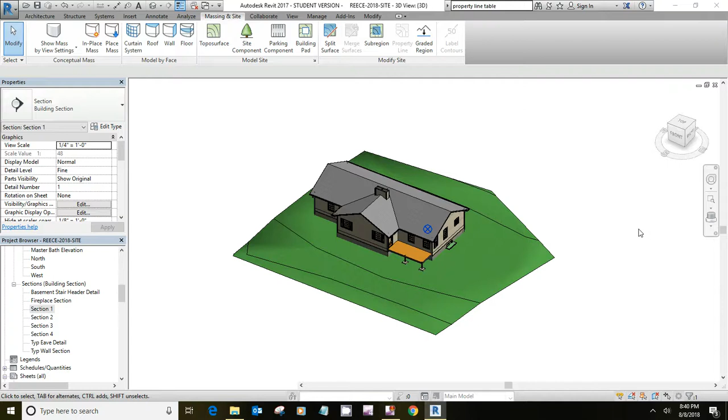All right, so we've got some soil and we've got some grass. Let's look around. All right, so this window well is showing up. Okay, it's above the ground surface, but yes, it's full of ground.

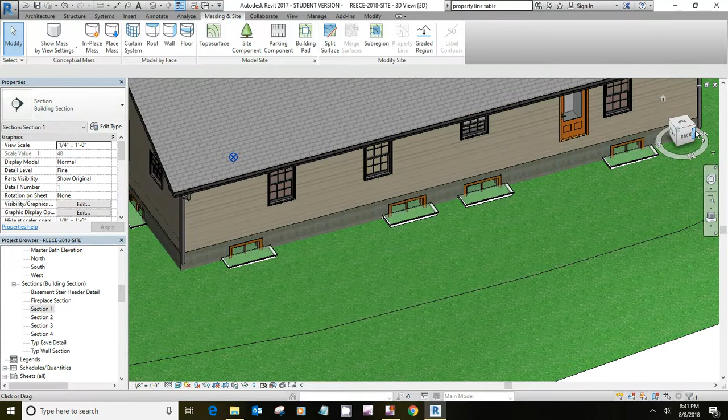So let's check the back side of our house. All of those are above ground. Okay, and that one's above ground.

If we had a circumstance where the window well was not above ground, then what we do is we go back and we add a survey point in the vicinity of that window well to push the topo surface down right in that area. Okay, and then that would get it fixed up.

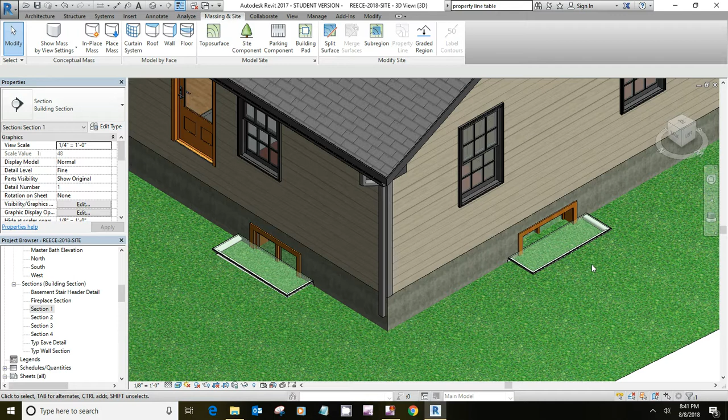All right, now then, take a look at your section view, and you will see that we have a basement full of dirt. Okay, and we deal with that with what's known as a building pad. And I'm going to go ahead and tell you we've got an issue right here with our footing and our slab because we're supposed to have 4 inches of gravel under the slab.

And we really can't. We could put in 2 inches and then 2 inches. It'd be kind of weird. And really, in the construction, they're going to do a full 4 inches across there. They're not going to do it 2 inches below the footing and 2 inches above. They're going to go full 4 inches.

The easiest way to fix this is we lower our footing by 2 inches, and we have to increase the height of our wall by 2 inches.

I'm going to go to this one, top of footing. I'm going to add 2 inches to that. It pulled everything down 2 inches. Okay.

Bottom of footing kind of changed. Okay, just to get that back in the right place.

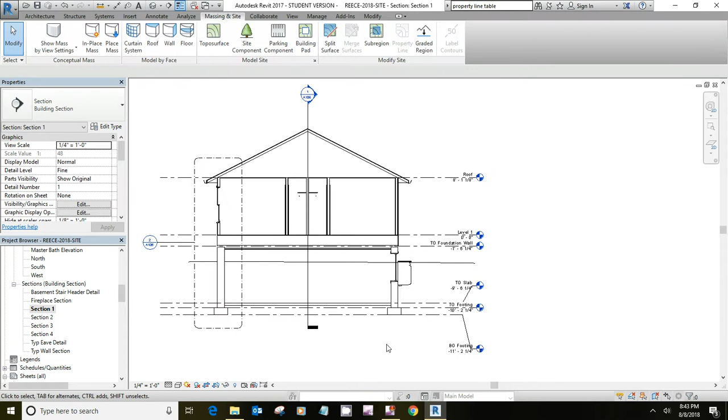Now let's go to our 3D view, because you can see when we pull that down, it dropped the top of our wall down from our house. But we could pick that, but I want to pick it in my 3D view so I can see what's going on.

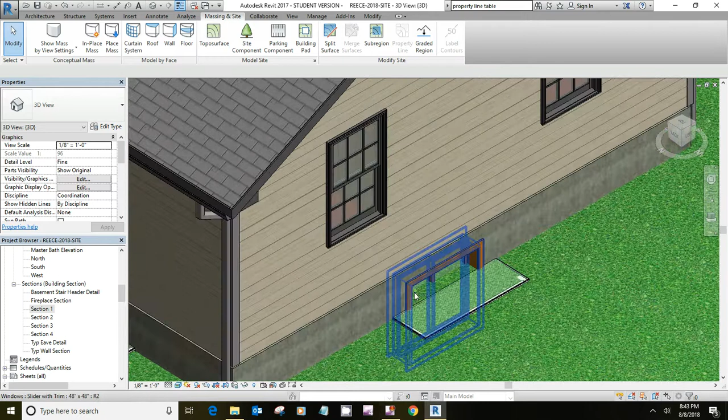If you come in here and you look at it, then you see we got a gap there. So let's select one of the walls and right click and go select all instances in entire project.

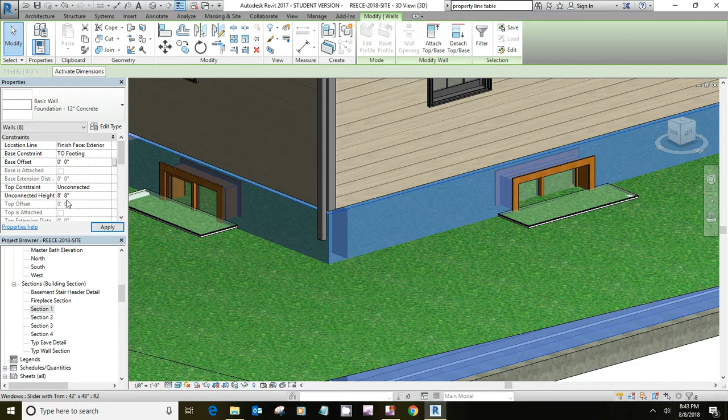And our top constraint, let's add 2 inches to the top of that and make it 8'8". Okay, so that closed that up.

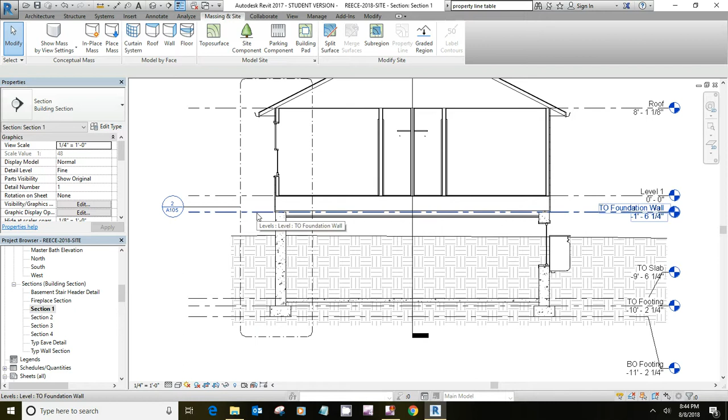Let's go back to our section view. All right, so that got that pulled back up to our top of foundation wall level. Or when you created the walls, if we'd have tied them to top of foundation level, then it would have been an automatic fix.

Okay, all right, now there's two different ways to deal with gravel underneath here. One, we can edit the floor to add gravel under it, or we can do a building pad that has the gravel. I'm going to show you how to do a building pad anyway.

So let's go in here. Let's just edit our floor. I think we can do that because there's nothing penetrating our floor. So let's edit. Let's duplicate it.

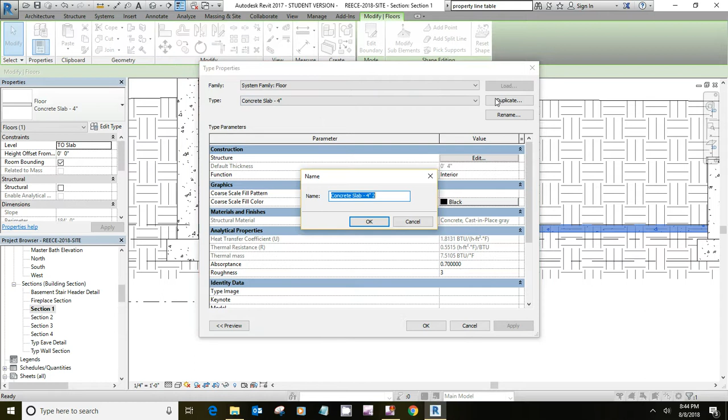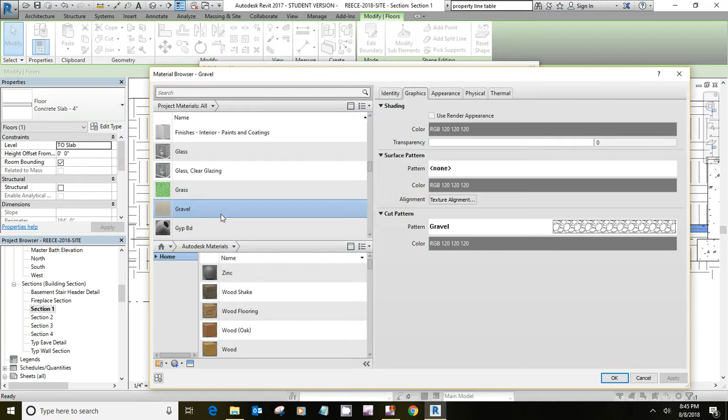And we'll edit our structure here, insert a layer. And I want gravel, so you do a search for gravel. If it doesn't show up here, it'll be down here in one of your materials. So you add it. And we'll go okay.

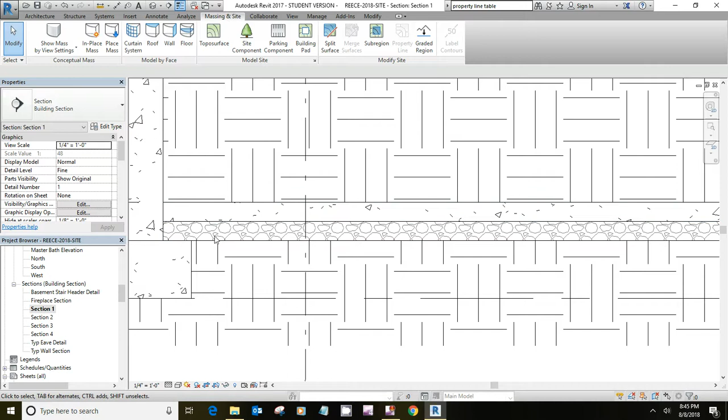And we want it to be 4 inches thick also. All right, and so that got our 4-inch concrete slab and our 4-inch gravel, and the top of slab level didn't change. Okay, we just pulled our footing down, and so the slab stayed at the same place.

Okay, so now we've got to get rid of all this dirt inside the basement, and we do that with a building pad. And to do that, we're going to... because you can see the wall actually cuts out of the dirt. Okay, and so we'll go back to our site plan.

And you remember these lines that we drew in here on our exterior walls? Those are fixing to come into play with us. We should probably hide our roof also.

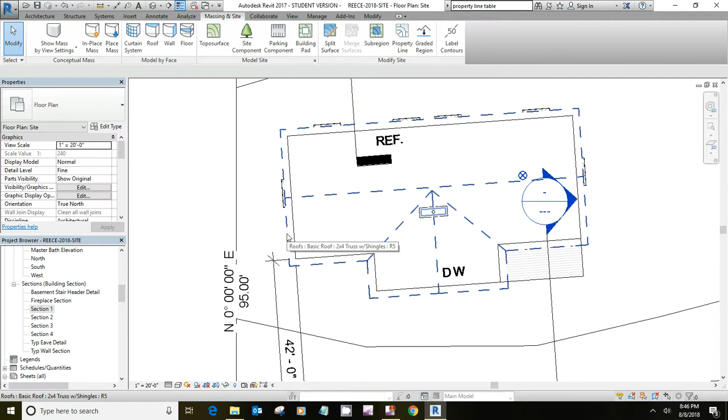Okay, so here on our massing and site, let's go building pad, and we need an elevation. Let's see, it could be top of footing. Height offset, we'll go 0.

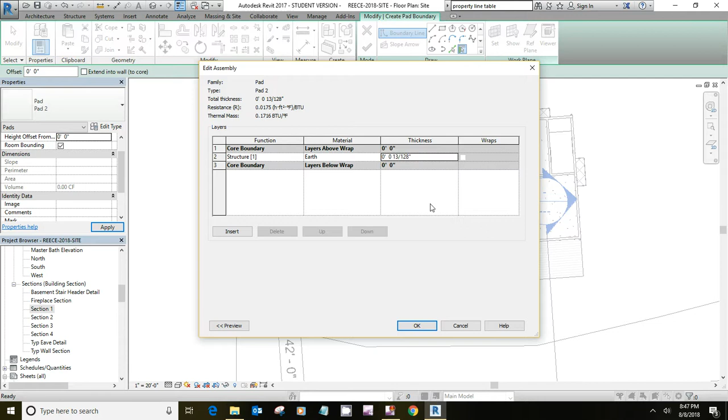Now let's edit our type and edit our structure. It is earth, and we want to make it really, really thin so that it's just a line. I put in 0.1 of an inch, and that come out to 13/128. So you just type in 0.1 inch, okay?

And that's okay, it may be pad 1, maybe pad 2, depends on how many of them you're doing, okay? And so let's go pick walls, and let's pick the exterior walls of the building.

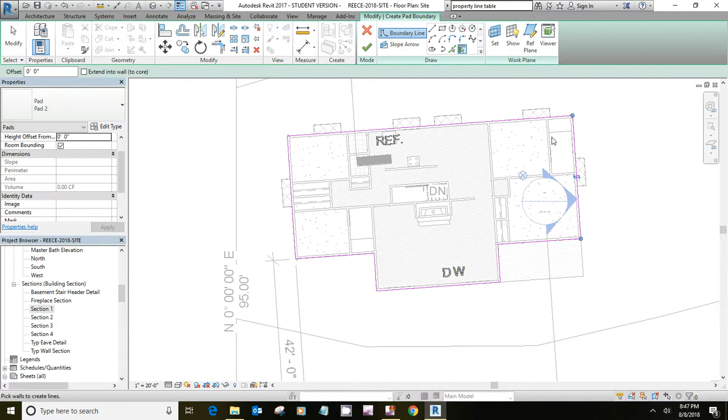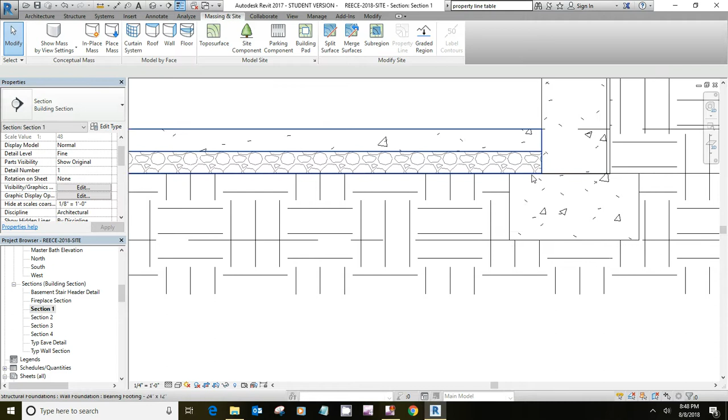Okay, let's go back to our section view to check it out. It took all the dirt out of the inside of our building. But in our section view, it has a line that comes right across here. If in our typical wall sections, where it was showing up earlier, you can see that heavy line right across there. Now if you zoom in, you can see it's kind of doubled, okay?

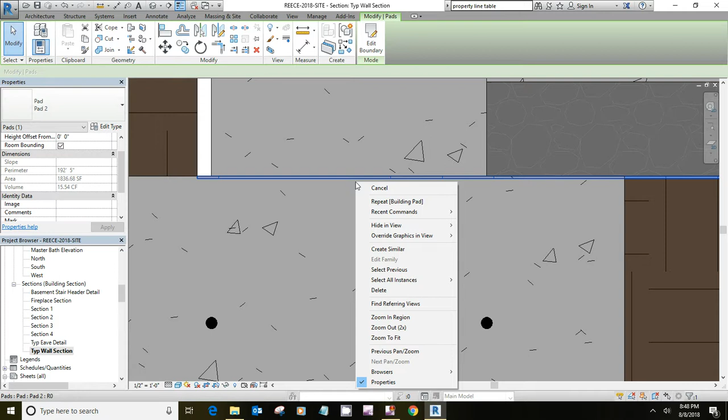So there I can select it, and I can hide that in my section view here when I get ready to go to print for my drawings. I can hide that so that I just get my regular line. Okay, so that's just one thing there.

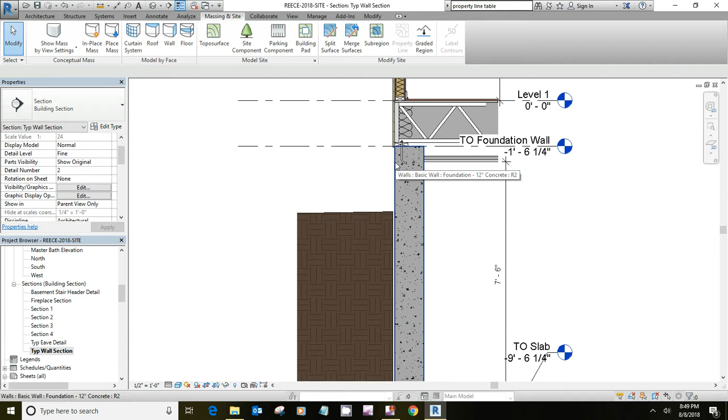Now then, you can see when I did that, I wasn't selecting against the wall, I was selecting outside the wall. I should have been selecting against the concrete. That's why I wanted the concrete wall showing up, not my frame walls. I don't know why my underlay did not work.

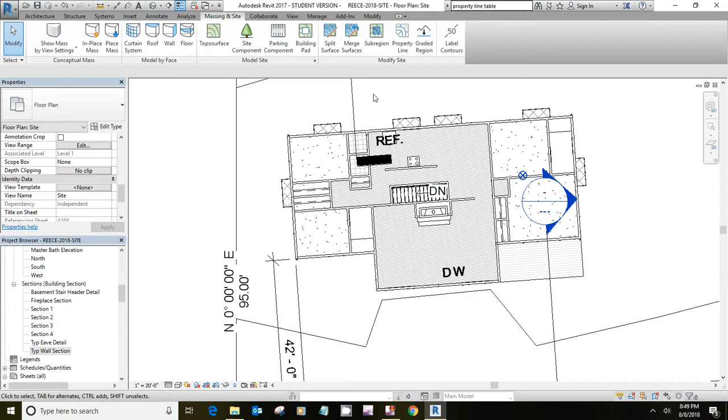Anywho, okay, we have an issue here with dirt. It's not showing here in the section, but in our 3D model it's got dirt showing up inside of that, inside of our window well, okay?

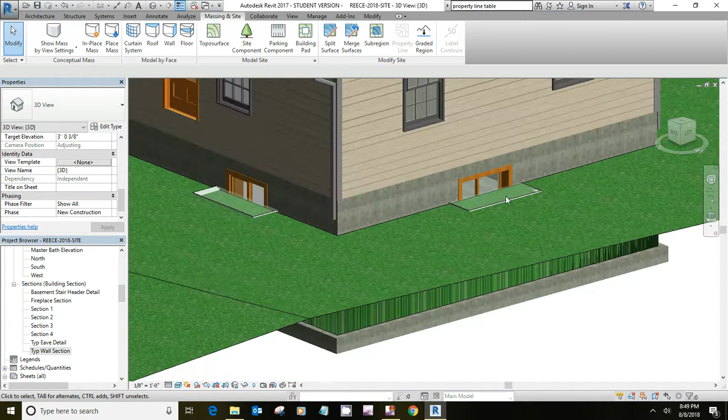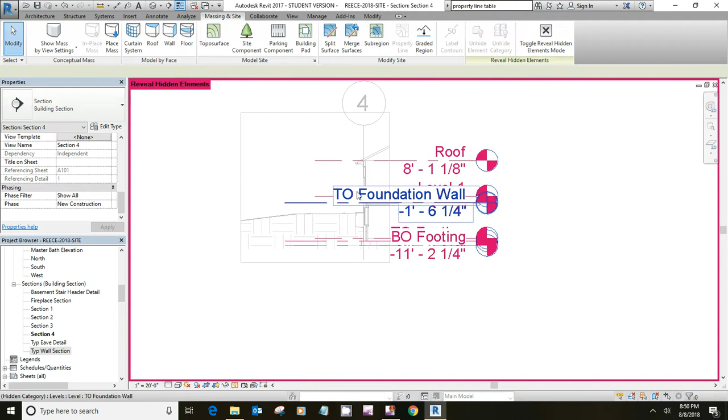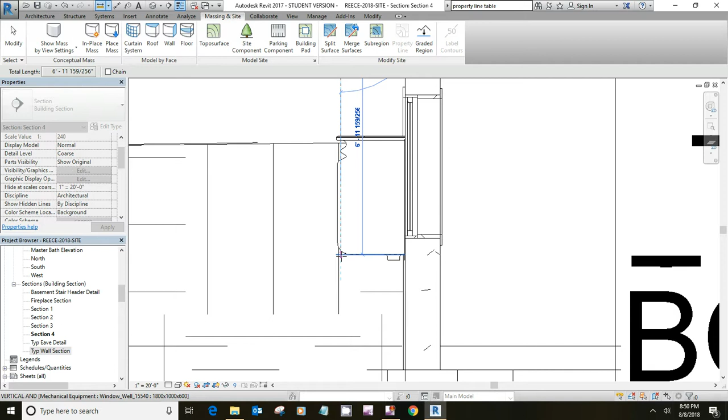And so let's see, oh, I turned off my... I need a distance from first floor down. And it's like, what, 6'11" and something. Okay, so we'll look at that.

Back in our site plan, we'll have to do another pad based on one of these. And I'm just going to do this one here to show you how it's done. And I want you to do at least one of them.

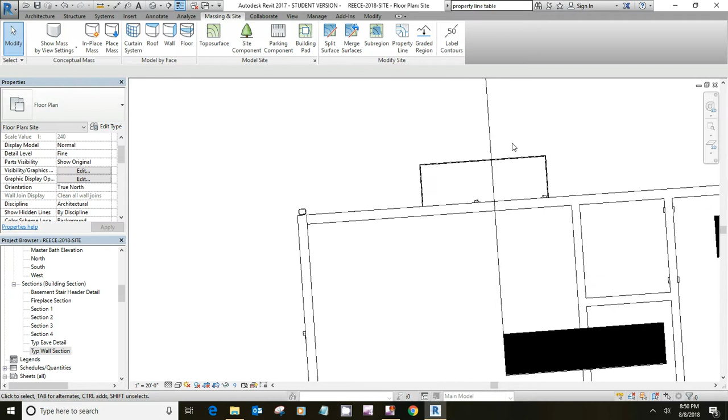Okay, well, that thing is not centered on the... oh, I had to move it because of the door. That's why. Do at least one of these wells so that you get a feel for it.

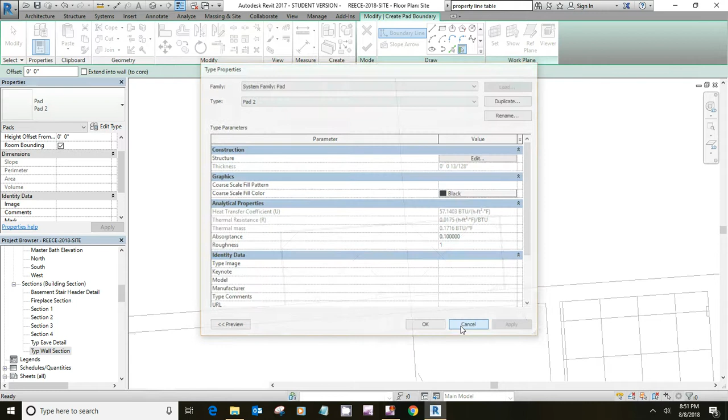And so let's do another building pad here. I don't think I need to change anything here, I think we can leave it at that. But let's go level 1, height offset of, what did I say? 6'10".

Okay, and we can do pick lines. I thought, oh, it's pick walls, pick lines. And then we'll have to do some trim.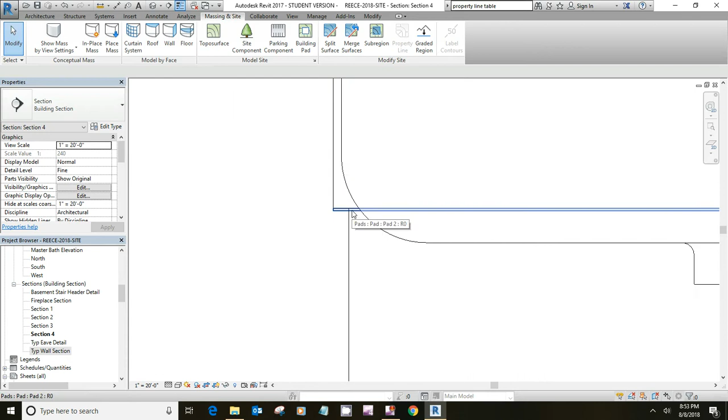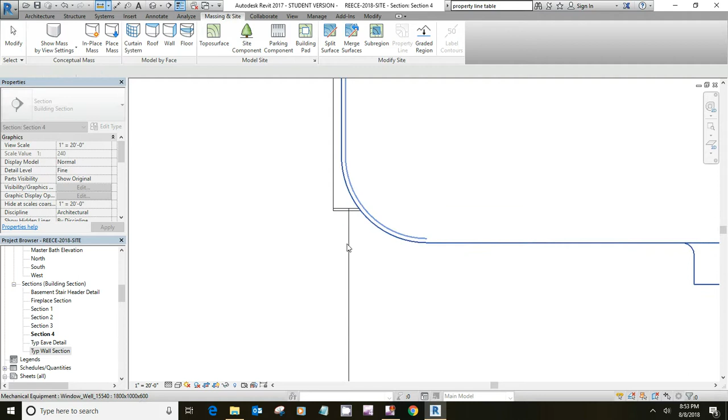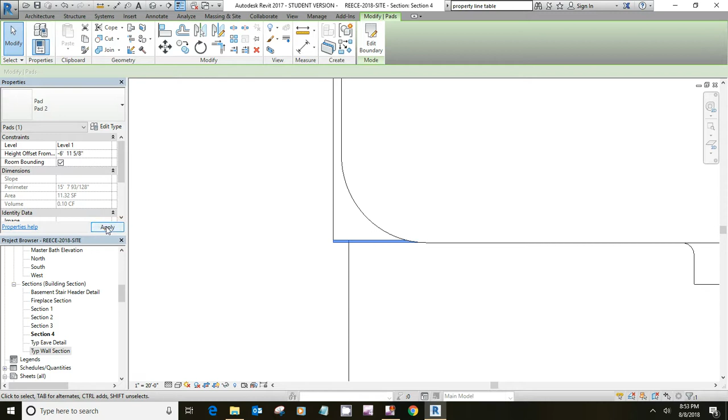So let's go back and look at this section. Yeah, okay. Just a little bit more.

That's really close, so I just want to make sure it got all the dirt out of the bottom of the window well, and the floor drain is showing. Well, the floor drain's full of dirt. Okay, so that's how you would do that. And so you'd want to do that on all of your window wells across there.

And let's see, building pad gravel. I'm checking my notes here. Did that, got window wells.

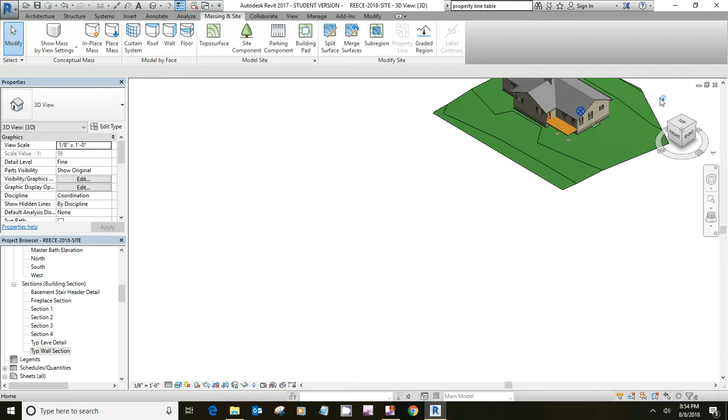All right, so let's take a look at a building elevation. Now here's one of the things with Revit, excuse me, is that it doesn't show the hidden lines underneath, behind the soil of the elevation.

One of the things, let's go back to our level 1 floor plan. Let's turn off our crop. And if you click on your elevation marker, the point of it highlights the cutting plane for that elevation. And so we can drag it in closer to the building, but not so close that it's cutting through the roof, okay?

And these, we may have to edit these a little bit after we get a little bit of work done when we add our stairs. Oh, that was way out there. Okay.

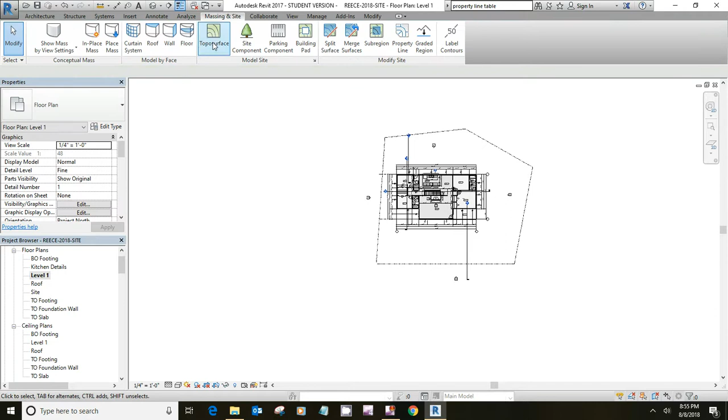All right, and so now let's go back to an elevation. You can see it changed based on where we put the cutting plane, based on the topography. Okay, so I don't know how to deal with showing the extents of the footings and things, so we're going to let it ride like that for right now, and just see how it goes. Okay, I'm going to stop this video and then start again.